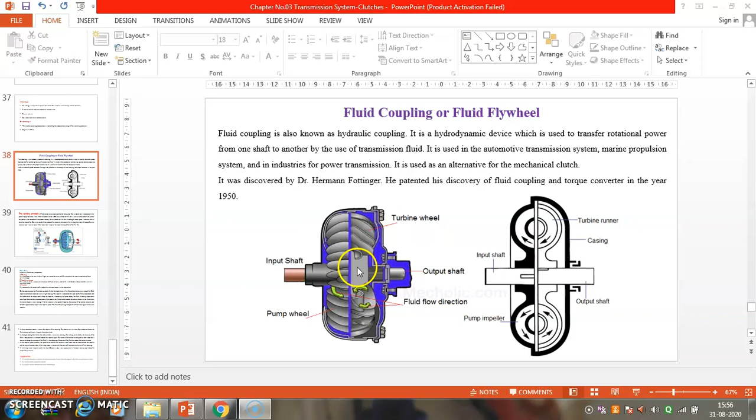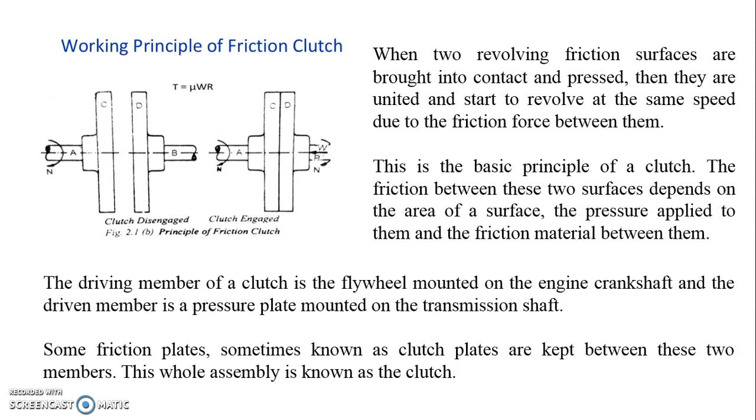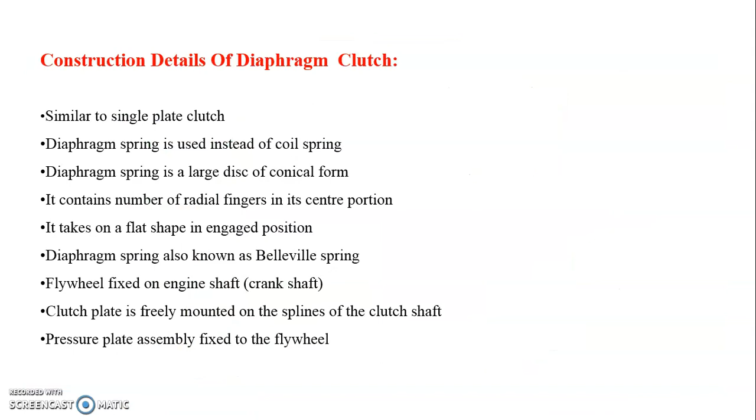Welcome to this lecture number 8 for transmission system. In the previous lectures, we discussed different types of clutches. In previous lecture, we discussed the electromagnetic clutch, advantage and disadvantage of electromagnetic clutch. Now, today we will discuss the last type of the clutch, that is the fluid flywheel or fluid coupling.

So, fluid coupling is also known as a hydraulic coupling. Fluid coupling or fluid flywheel is also known as hydraulic coupling. It's an advanced system of power flow from engine crankshaft to the transmission. So, it is a hydrodynamic device which is used to transfer the rotational power from one shaft to another shaft by the transmission fluid. This is an advanced system for power flow from engine crankshaft to the transmission.

It is used in the automotive transmission system, marine propulsion system, and in industries for power transmission. It is used as an alternative for mechanical clutch. It was discovered by Dr. Hermann Fottinger. He patented his discovery of fluid coupling and torque converter in the year 1950.

So it offers jerk-free engagement of gears and thereby it will damp the shocks while engaging a revolving crankshaft during the transmission. It is generally used with epicyclic gearbox or luxury cars equipped with automatic transmission. It is operated by pressing the accelerator pedal only.

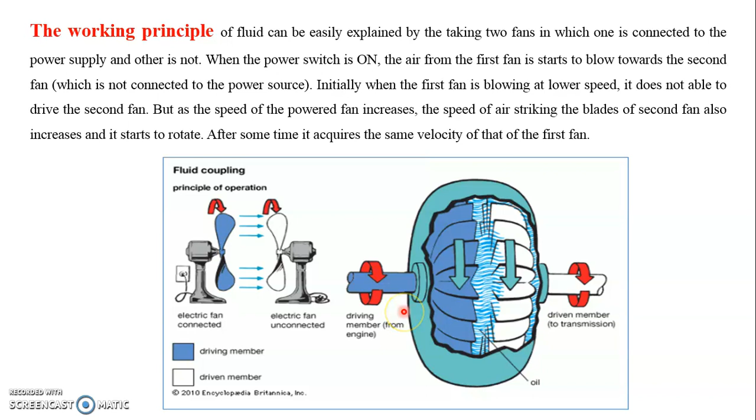So, this is the working principle on which the fluid coupling, fluid flywheel or hydraulic coupling works, which has a driving member and a driven member. This shows the actual diagram of the fluid flywheel, having the driving member from the engine and the driven member to the transmission system. So, let's see the different main parts of the system.

Housing is there. It is also known as the shell. It has an oil-tight seal around the drive shaft. It also protects the impeller and the turbine from outside damage. Impeller or pump: it is connected to the input shaft and called impeller. It is also known as a pump because it acts as a centrifugal pump. Turbine: it is connected to the output shaft to which rotational power is transmitted. So, simply, impeller is the driving member, turbine is the driven.

So, on the same principle, the fluid coupling works. The impeller acts as the first fan, the driving, and the turbine acts as the second fan, the driven. Both impeller and turbine are enclosed in an oil-tight housing filled with oil, and oil-tight sealing is provided to avoid leakage. The impeller is connected to the input shaft of the prime mover, that is the engine shaft, and the turbine to the output shaft, that is the input shaft of the transmission gearbox.

So when the impeller is moved by the prime mover, the fluid in the housing experiences centrifugal force, and due to the curved vanes of the impeller, the fluid is directed toward the turbine blades. As the fluid strikes the turbine blades, it starts rotating. With the increase in the speed of impeller, the velocity of turbine increases and becomes approximately equal to the impeller speed. The fluid, after passing through the turbine blades, again returns to the impeller.

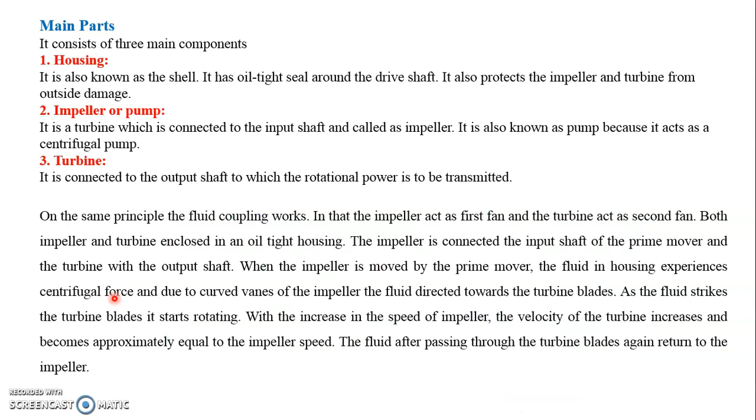So in this manner, a moment comes when the impeller and the turbine are both moving with the same speed. Thus both start rotating at the same speed, and hence the speed of the output shaft becomes identical to the speed of the input shaft, provided slip does not occur between the two members. So in this way, the fluid coupling acts.

So let's see the applications. It is used in automotive industries for the transmission of power from engine to wheel as an alternative to the clutch. It is used in marine propulsion systems. It is used in various industries for power transmission. Also, it is used with the automatic transmission system in all luxurious vehicles.

So this is the end of this part of the automotive transmission system, that is, the clutch. In this section, we studied the definition of clutch, function of clutch, requirements of clutch, the principle of clutch, and various types of clutch, namely single plate clutch, multi plate clutch, diaphragm clutch, semi-centrifugal clutch, centrifugal clutch, electromagnetic clutch, and lastly the fluid flywheel or fluid coupling.

All these clutches are very important from the examination point of view. In the examination, they may ask about any type of clutch or the requirements of clutches. So I request all of you to practice all these figures for the respective clutches. Accordingly, you can attempt the quiz as well as solve the assignments.